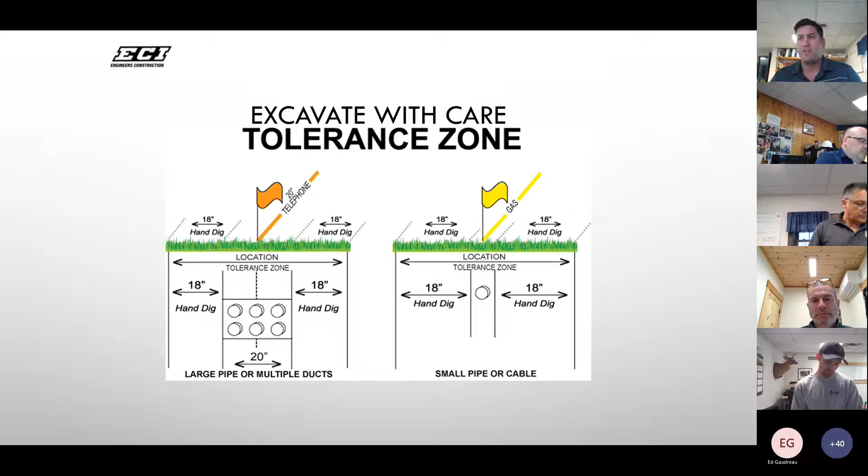So how do we go about it? Our best practice is through our administrative controls is always have a spotter. Let's always make sure that we don't have an excavator operator digging around a known utility corridor without a spotter. So we should have someone always making sure it's teams of 2 out there, and we're always looking for trench lines or any other known facility that we might come in contact with.

Preserve those markings, it's easy for us to lose those marks. So again, in your field book, if you have to make offsets or put in stakes, so you can always go back to where those utilities might have been. Also, I know we use Gunner, Mike, and Richard quite a bit for shooting GPS on some of these longer longitudinal projects. Again, that's another good best practice.

Do not excavate within the tolerance zones with mechanical equipment until we can visually see it, either cross-bore or until we visually see the utility and we know we got clearance. So if we follow those best practices and a situation comes up where the utility is not marked, we've got a leg to stand on to not have to pay that bill for the damage. So let's try to remember those.

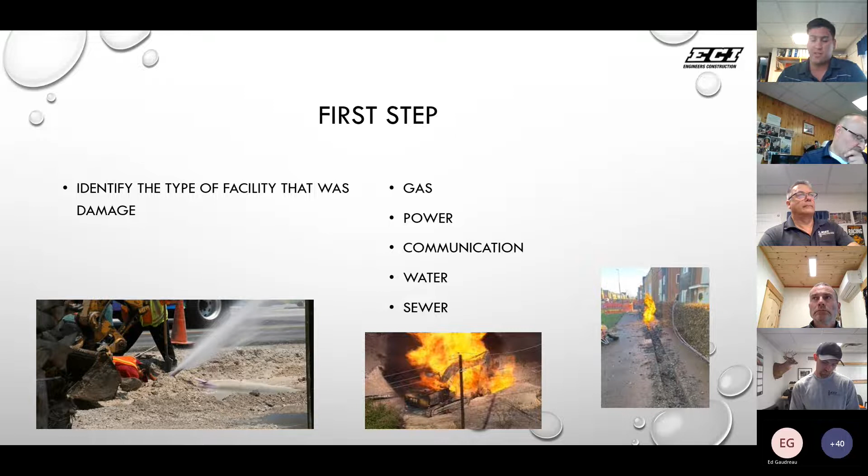We also want to make sure that if it is gas or power, we make sure the site is safe and back off our equipment if we can, to make sure the situation is under control. So when we're dealing with gas, if it's leaking, let's move to a safe distance away, call 911. We can contact Vermont Gas and follow our internal reporting process. Again, all this information is in Teams under the files folder for a lot of points of contact.

If it's power, majority it's going to be Green Mountain Power. So let's move a safe distance away from the utility and contact the facility owner. Call 911 if you're unsure. Remember, don't touch, and remember the touch and step potential. So we really want to be careful with that type of exposure if damaging an underground power line. Keep all employees and bystanders away until instructed that the power line is de-energized, and then follow the internal reporting process.

Again, with water, there's been some fatalities in New England in the last couple of years regarding water breaks in deep excavations. So again, remove personnel from the trench right away. If possible, turn off the water source, notify the facility owner, and again, follow the internal reporting process.

So these are all kind of dangerous situations that we might take for granted because we're around it every single day, 365 days a year. But again, it can be a very dangerous situation if we don't put the right emphasis on using spotters, knowing what our known facilities are, creating offsets, digging with care, following the tolerance zone. All those best practices will help avoid that, but we need to make sure we have them prioritized correctly.

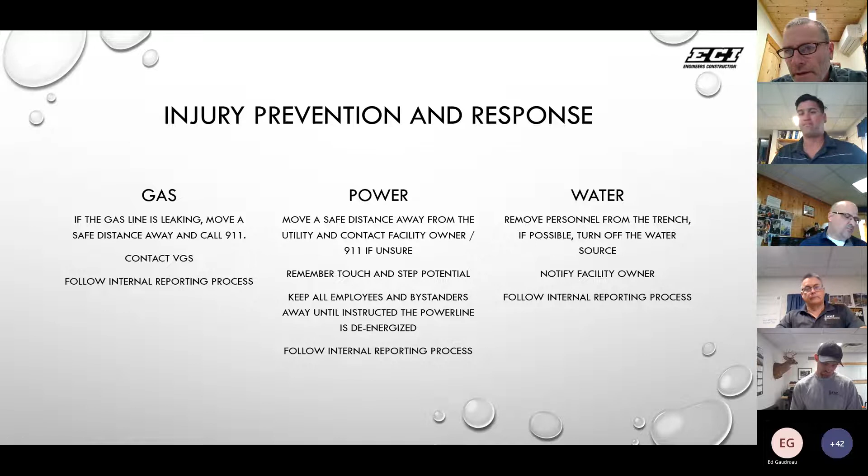Anything to add, Ken? Oh, I think you got it covered there, Matt. If anyone has any questions about anything related to underground excavation, just certainly check with Matt. Okay, turning it over to me, Matt.

Take it away, Ken. Okay, I'm going to have Ben McKinney start off with an announcement on fleet maintenance. Thanks, Ken. Can you guys see my screen?

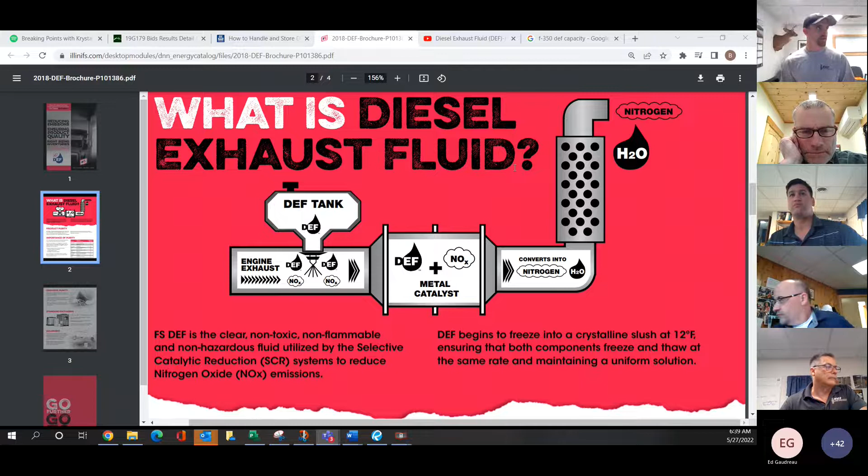Got it, yep. Just wanted to talk real quickly about diesel exhaust fluid, DEF or urea. As a lot of you guys know, DEF is required in most of our modern, larger equipment and trucks. All Tier 4 final diesel engines over 74 horsepower require diesel exhaust fluid. So you're going to see that on most medium size and up excavators, loaders, big trucks, diesel trucks, F550s, etc. So DEF is a mixture of water and urea that gets injected into hot exhaust to create a secondary combustion process with a catalyst and turn nitrogen oxide to break that down into nitrogen and oxygen, two main components of air.

So we have to add DEF. It's not in the diesel. This is something you have to add. So if you're operating an F550, or if you're a truck driver and you have a big truck, or if you're an operator and you're running equipment that takes it, you should have a gauge in the vehicle. In lieu of a gauge, there would be a warning light that comes on before it's out.

It's important to fill DEF up when the gauge gets low or when the warning light comes on, because these vehicles and equipment will go into limp mode without it. Legally, you're required to keep this system in operation, and the engine will derate if that tank goes down to within about 5%. There's no need to try to keep it topped off. It's not like diesel in that sense where we are concerned about trying to stay above half necessarily.

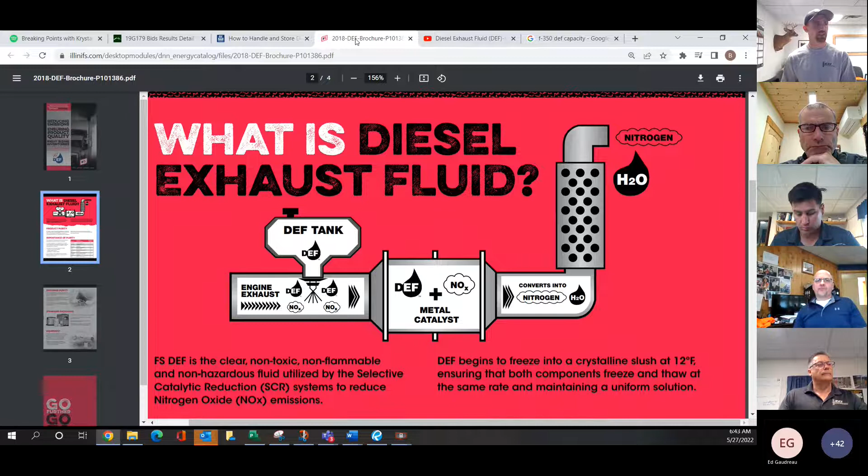I think that's about all I've got. If you have any questions, just feel free to ask the guys in the shop and they can help you out.

Yeah, and I would say if you do spill it, you should check the material data sheets, right, Matt? Which you probably have one for the DEF, I think, on Teams. Yep, located again, Foreman Super Files Library. You'll see a link to our SDS, and then you can search by just typing in DEF, and it'll pull up the SDS.

Cool, and just spoiler alert, I agree, you should definitely look at the safety data sheet. Not too many health concerns. I mean, I don't think you want to pour it on your face, but it's largely benign. If you got a little bit on your skin, just wash your hands. But yeah, check out the data sheet.

Okay, all set? Good job, Ben. Thank you. Yeah, thanks, Ben. I'll take over here.

See if I can get the right window. There we go. Can you see my screen? We got it. All right.

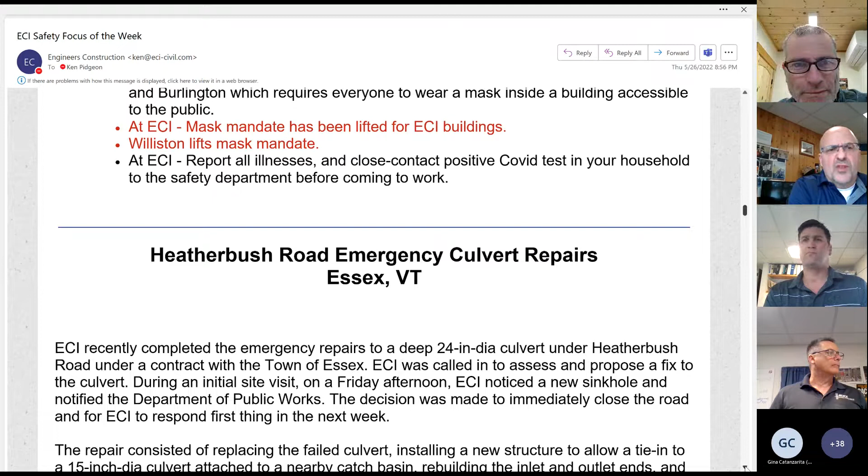Ready, Brian? Yep, I think so. You want me to advance the slides? Yep, I'm just going to grab my screen here. Unless you're going to scroll for me, Ken. I can scroll for you. Doesn't matter, okay, just tell me when.

We got a call from the town of Essex about a sinkhole they discovered, and they were worried about their road. So we went and did an assessment for them, ended up closing the road, and found they had a storm pipe, very old, that crossed the road and went down one of the neighbors' properties and outfalled on the other side. The problem was it was really deep.

It was like a 20-foot deep culvert on the other end, so we had to come up with a solution really quick, which was to put another culvert in, keep that one running long enough to keep the water going, put a new one in, and we raised the grade and actually put it up on top of the old one so we didn't have to go so deep.

For some reason they had a catch basin, a series of them that collected to one and then went into that old culvert, which we have no idea how they connected down there because there was no manhole connecting them. So we had to add a structure to the job so we could properly connect the catch basins into it, which ended up being another 15-inch culvert.

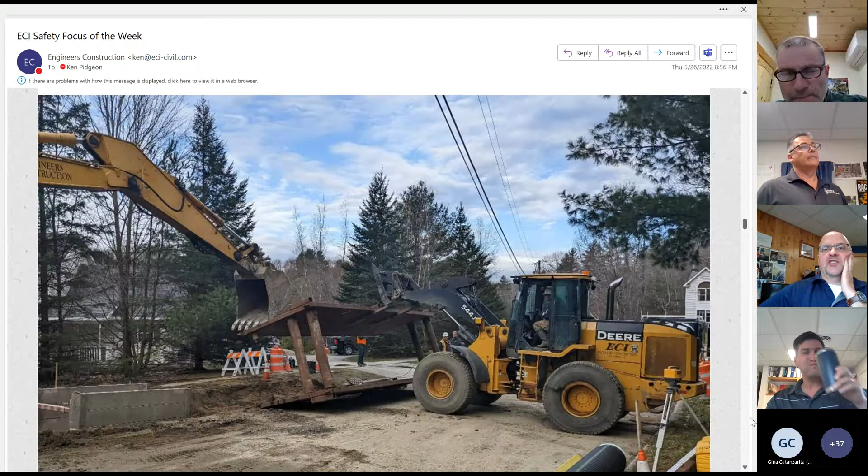Okay, next slide. There we go. I'm still stuck on the first one. There you go, got it?

Yeah, okay, so this was actually them taking the box out, removing it from starting back at the catch basin. You can see the grate sticking up behind the box there. They had got that section in and were moving on, so we needed to get the box out of there. We left that in for a long time because of the people - it gave a nice barrier so they couldn't get near the ditch.

Yeah, you got power lines above too, it looks like. Yeah, we had to deal with the power lines on the inlet side.

This was the guys working around the water line, which was a transite pipe. After everything was all secured and backfilled, it did end up breaking on the end.

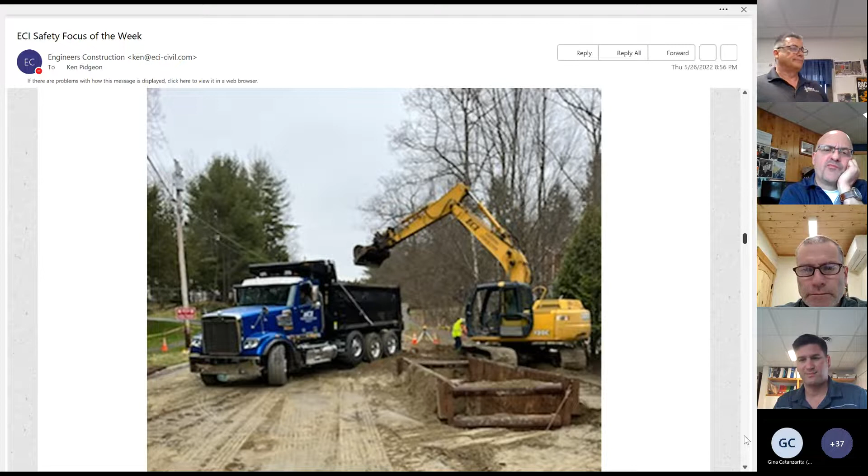Uh-oh, I'm having trouble. Got a weird noise on my computer too. If there are problems with how this is displayed, view in web. I got a beeping noise on my computer. You guys got a beeping noise? Nope. You want me to try sharing mine? Yep, so Brian can take over. Ken's overloaded his machine already. Yeah, you know how many windows I keep open all the time.

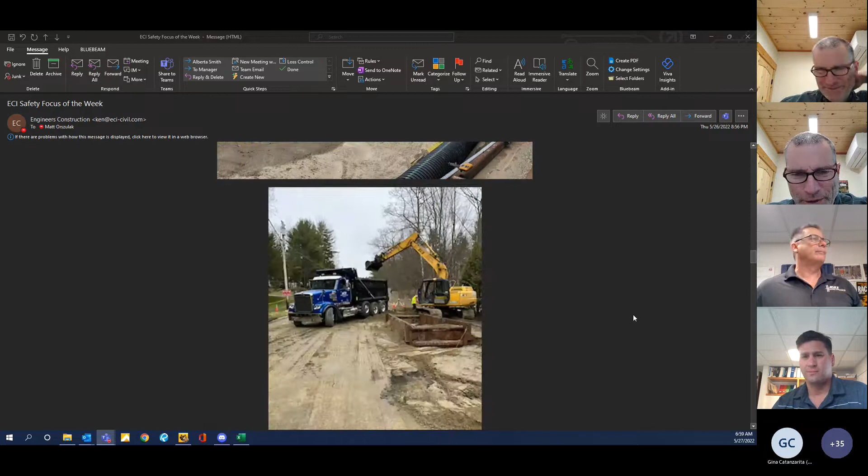Can you guys see that? I got it going, Brian. Let me know what you want to do. Can you see mine now or no? We see something. Yeah, we see the truck and the excavator.

That right there, I think we're finishing the crossing. Not much of a picture.

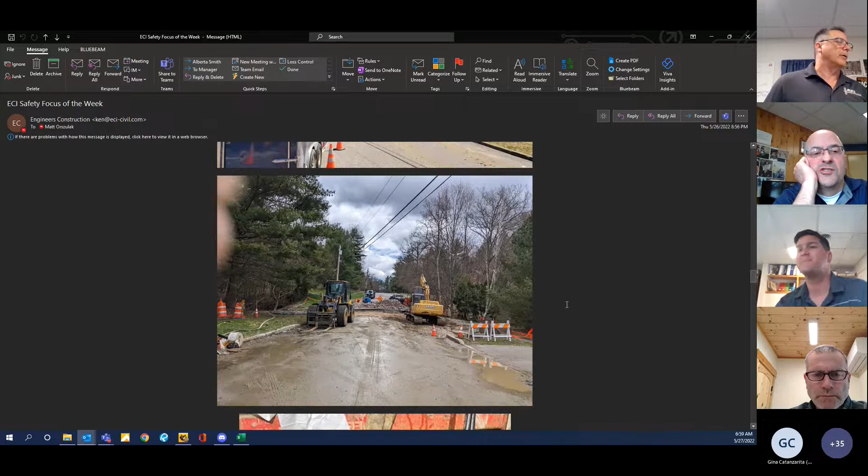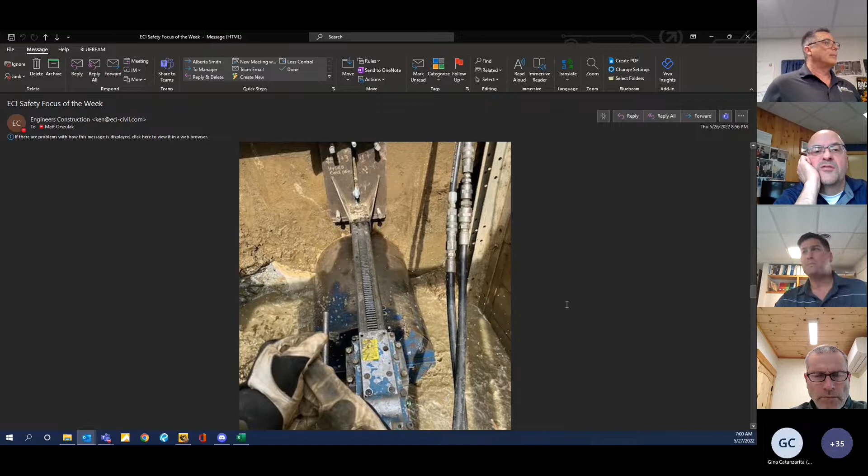Ah, you got the hydraulic one. That's good. Yeah.

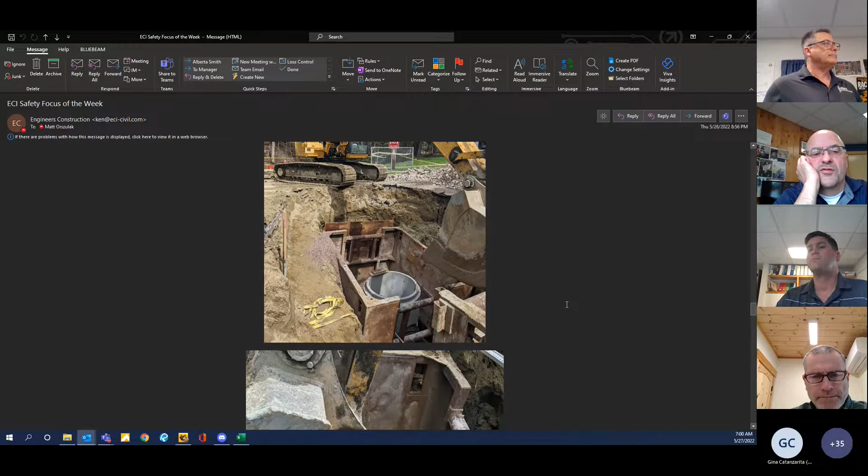Here's Greg and Rob and Joe and the guys working on the structure part, and Vinny too. Here's Rob in there making their connection. I think he was leveling the structure right there.

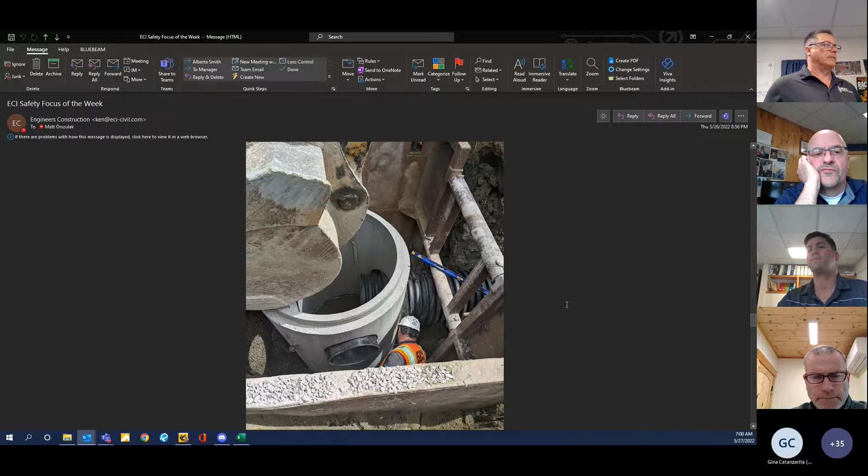Kind of looks like they're using the excavator to move the structure around, rock it to one side, chink some stone under there, and get it level.

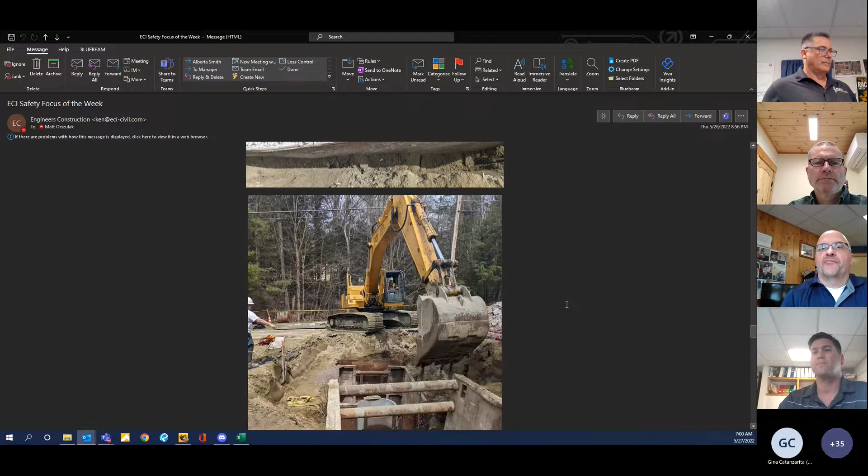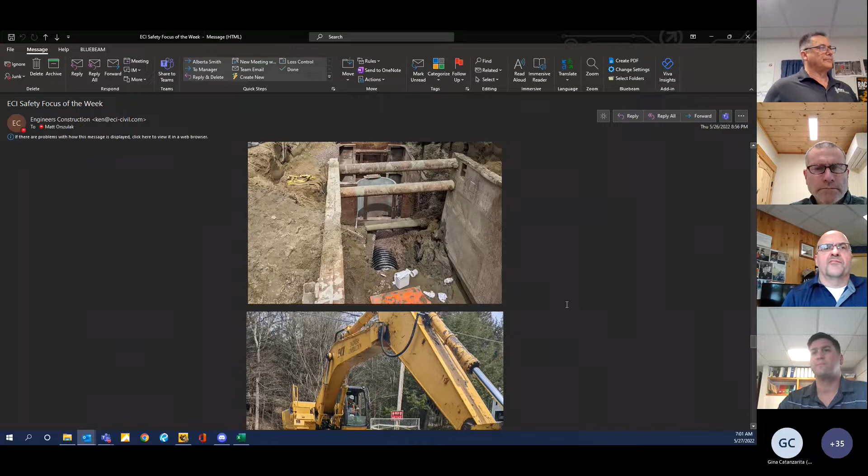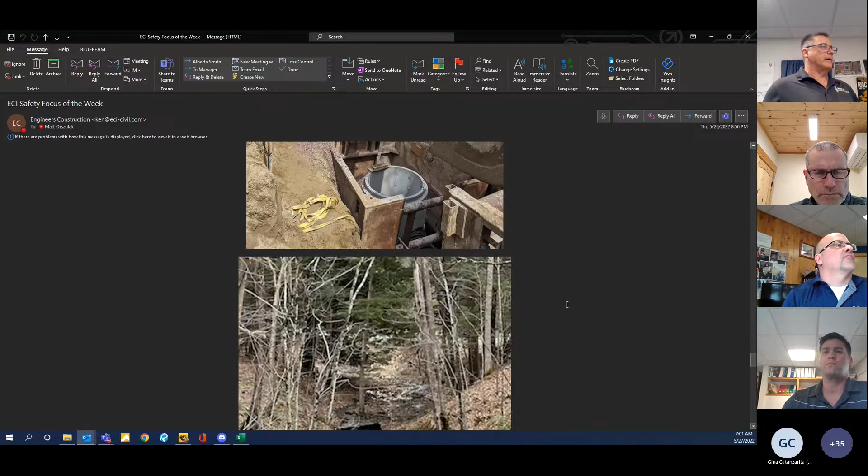Some backfilling going on. That was the 15-inch from the catch basin right there, and another structure backfilling around. Here's the outfall. We got our silt fence in to try and catch any of the soils before they got too far.

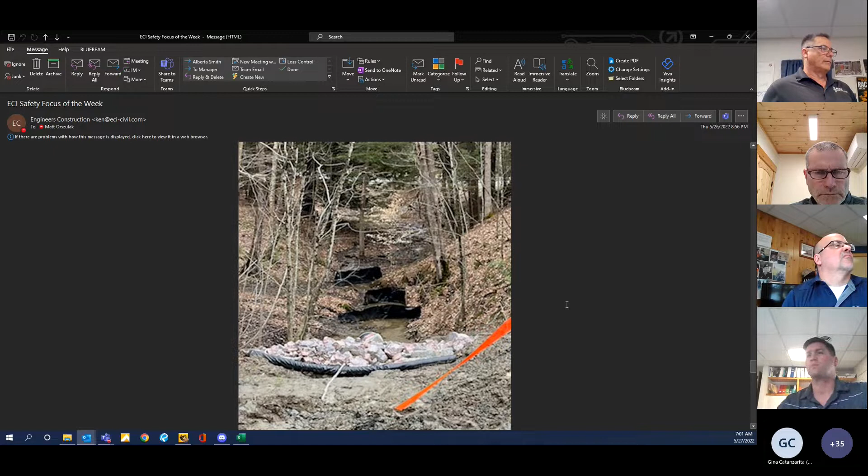We put some fabric and then some rock up on the outlet side to armor the bank. The owner actually asked us if we could put some topsoil and grubbings on top of the rock because he wanted it to look more natural. He didn't want to see the rock. Here's the inlet side.

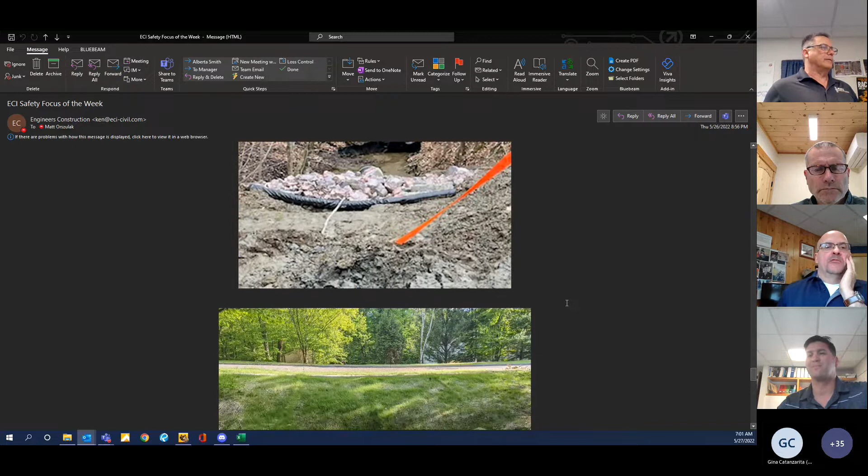Grass is going nice, it sure is. And here's all the new sidewalk we had to put in and curb line to get the new structure in, and ready for pavement. I think Jim's actually paving that today.

We wanted to give it some time to settle because we weren't sure when we flowable filled the old culvert that we got it all, so we wanted to give it a couple days to see if it would settle and figure out if we had to add more or not.

Kevin is one of those, and he worked for ECI. He was killed in action on May 25th, 2004, while in Iraq. We miss Kevin, he was a big part of ECI at the time. He was a project engineer, and he brought a lot of energy to the company and to our culture. It was just such a sad, hard thing to see. He left behind his wife Heather, and a very young son and daughter, Allison and Nathaniel. This was like 18 years ago.